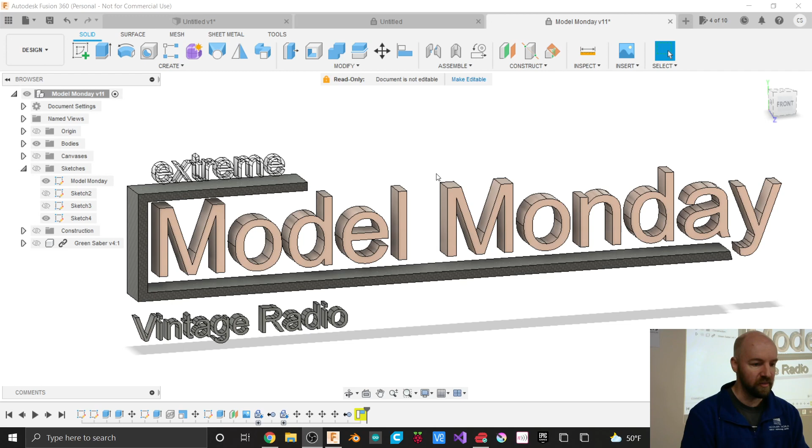The way that I'm going to approach this is from a sheet metal standpoint. So the idea here is we have a piece of wood that we kerf cut and bend into that outer curvy shape of a radio. And maybe this will make more sense once we actually get started.

So I've got a new document open here. And actually, before, kind of this kind of thing here. I think the one I draw is going to be a little bit different than this, but this is kind of our general idea of a shape we're going to try to get done in class today. I'm going to go ahead and not even save that, because I'm bold like that.

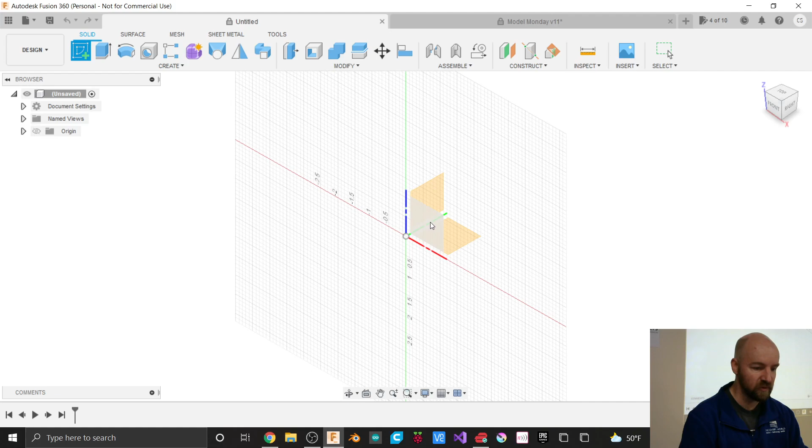All right, cool. So I'm going to go ahead and start a brand new sketch. So I'll click on this create sketch icon here. I'm going to start my sketch on the front. So I'm going to use this front drawing plane here, so I can click on the front in my navigation cube if I want to make sure I click on the front drawing plane.

And now on this drawing plane, this is going to define the shape of our radio. So let's first think about a height and a width. So I'm going to grab my Create menu tool, the 2-point rectangle tool. And I'm just going to use this 2-point rectangle to define the outer edges of my radio.

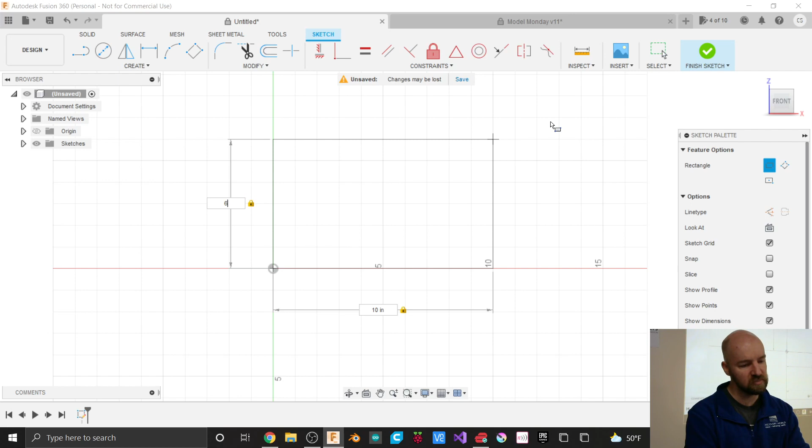So I want my radio to be like 10 inches wide and let's say 7 inches tall. 10 by 6? 10 by 6. That seems pretty good. Looks like a nice ratio to me. I suppose we could use the golden ratio or something like that, and I'll probably draw a couple of these sketches just so we can get a feel for the different kind of shapes that we can do here.

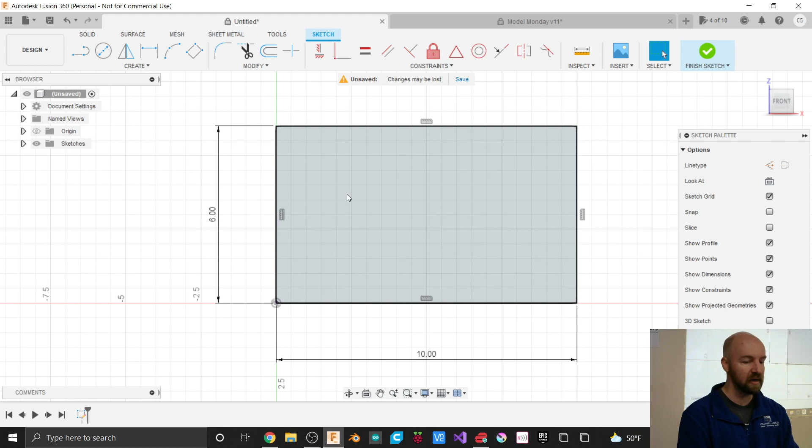So I'm going to turn all of these lines into construction lines. The reason being is I'm just using this to define the outer edges of my sketch. I'm not actually going to use these lines. So I'm going to turn these into construction lines here just by clicking on them and pushing the X key.

You can also highlight them, and then in the sketch palette we have here, you can change the line type into a construction line there, and that'll change that to a dashed line.

And now I'm going to start actually drawing my radio. So I'm going to grab my line tool and I'm going to draw a line out from the bottom center here. So right down here at the bottom, right at the midpoint, I have my little blue triangle that pops up telling me that I'm snapping to the midpoint of this construction line.

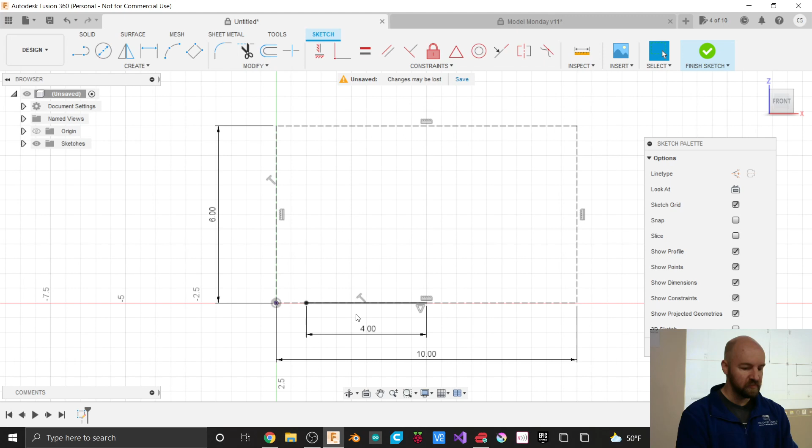And I'm going to draw my line over, let's say, 3 inches. That seems fine for now. Maybe 4. Let's go a little bit further. Now, you can move these measurements around if you want to place them in any particular way. I'm going to draw another line that goes up from here up to the top corner here. And then finally, a last line that will go over to the middle here.

And now I'm going to draw one more line that just kind of divides it right in half. And that line too, I'm going to turn into a construction line. So I've kind of got half of my frame drawn here. And I'm going to add in some curves now. So in the Modify menu, I'm going to come here and grab my Fillet option.

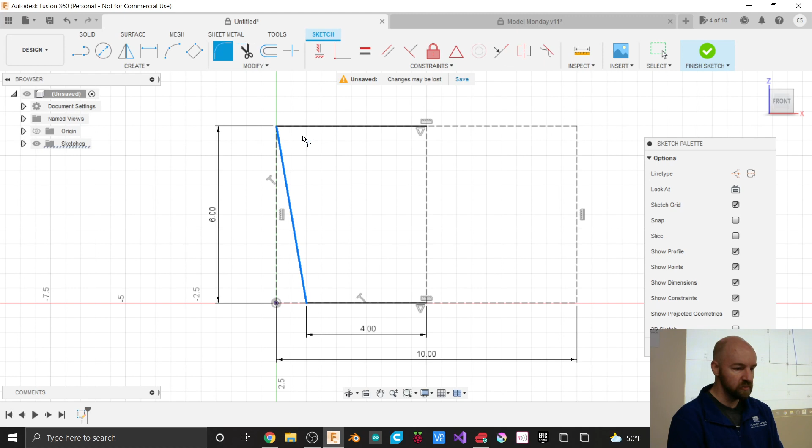So what this fillet option lets us do is choose 2 lines that are connected to each other, and then specify a dimension here. So I'm going to go with 2 inches. 2-inch radius seems pretty good. And before I click enter, I can add in additional lines to add fillets to. So I can add that same 2-inch fillet right down here at the bottom as well. And then if I hit the enter key, it'll go ahead and place those fillets.

And you can see I've got a radius dimension here that it gives me. And if at any point I want to change that, say I want to make that 3 inches, oh, it swore at me. Failed to resolve. Modify one or more of the following constraints. Those tangent constraints are... That's interesting. Well, 2 inches is what I wanted it to be anyway.

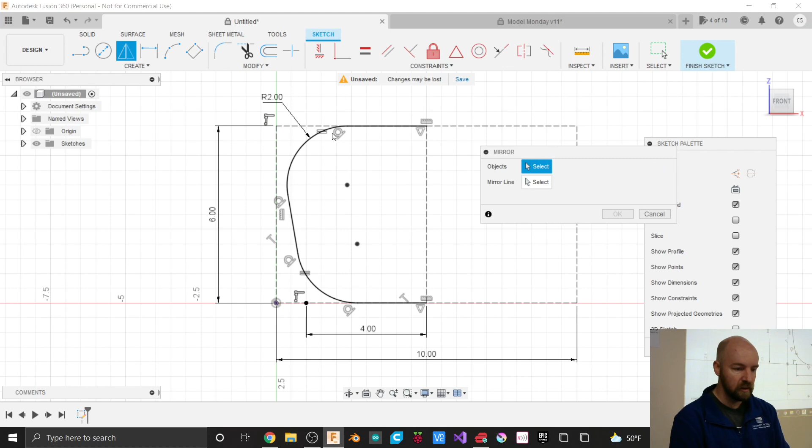So now the only thing I have left to do to complete the shape of my radio here is to mirror it over to the other side. So I'll grab my mirror tool here and I'll specify each of the lines. And it may be a little bit of a dance to pick the right line. I don't want to pick the dashed line, I want to pick the solid line. So you can see the dashed line is not highlighted, but my solid line that I drew is there.

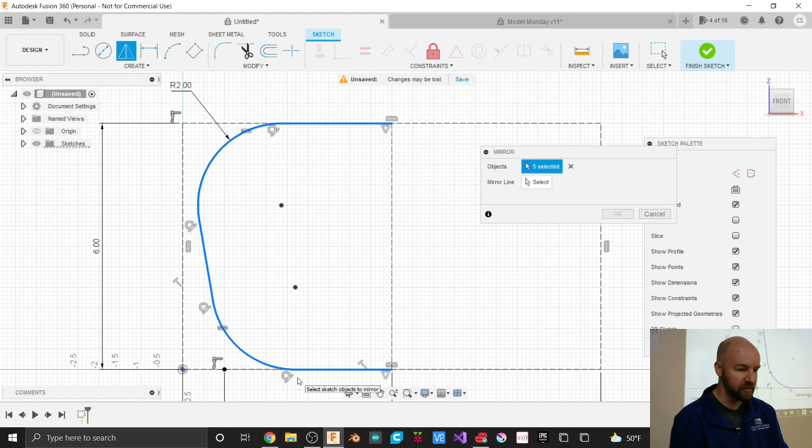And because those lines are right on top of each other, it may be a little dance. You may have to zoom in to make sure you're able to highlight and click on the proper line there. And then as our mirror line, I'm going to choose this middle section right here. And then I'm going to say OK. So that's the basic shape for this radio here.

Let me go ahead and draw another one just to show you options here. I'm going to just draw it right next to it, because why not? So I'll grab my rectangle tool, I'll grab a 2-point rectangle, and I'm going to place it right in here. And I'll make this one the same size, 6 by 10 is what I made it. And again, I made these into construction lines.

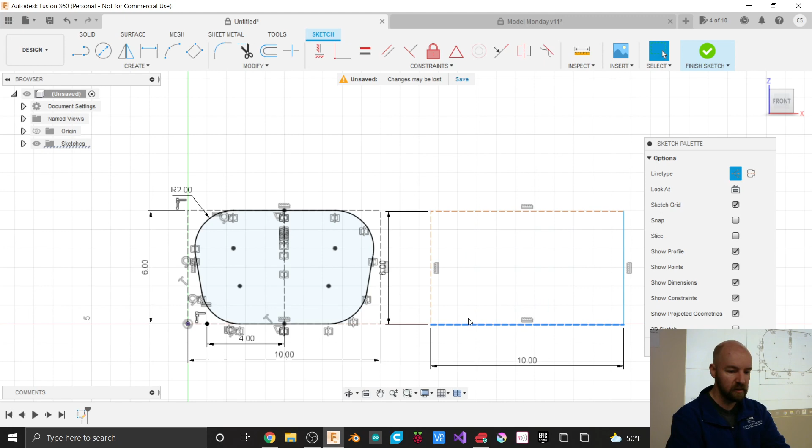This is where we're getting into that creative freedom that I used to point out a lot in class. Because ideally, you guys are going to draw your radio. You guys aren't going to draw my radio. You want to make your own thing. So that's why we're makers here at the Makerspace, because we want to make the stuff that we want to make.

All right, so let's see. Another shape that we could do is, what if it was just kind of an oblique shape? That's kind of interesting. So if I grab my line tool and I start in the bottom corner and I go over to the side at kind of an angle like this, and then I just connect those lines to our midpoint.

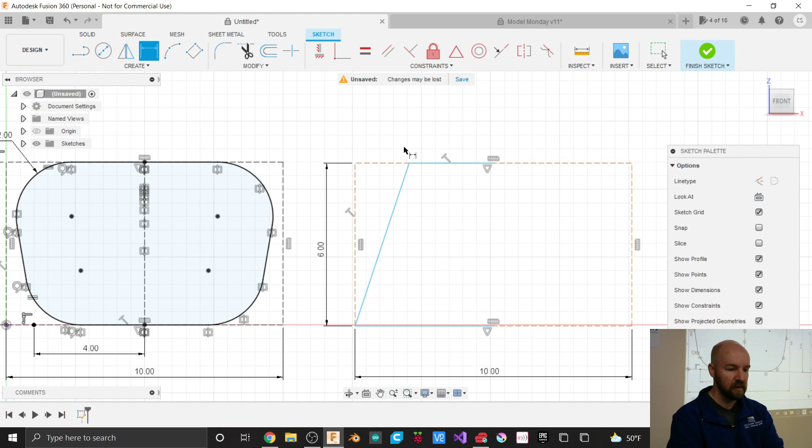Let's see, how could I specify? Maybe what I'll do is add a dimension. What I want to do is draw this line over here, but I want it to be kind of symmetrical. I won't be able to use the mirror command like I did before. However, if I add a dimension here, if I go up and say sketch dimension, and I figure out what length that is, maybe I'll make it a nice round number like 2 inches.

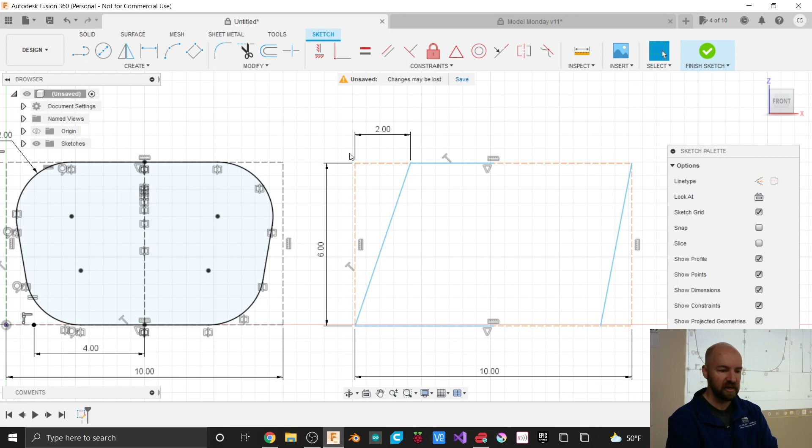Now I can do the same thing over here. I could draw a line from the top corner somewhere down to the bottom here, and I'll purposefully make it in definitely the wrong spot. And now I can use that same dimension tool. So up here I gave this a dimension of 2 inches. Down here I'm going to do the same thing. I'm going to say create, and then sketch dimension, and give those 2 points a dimension, and I'll just give that 2 inches as well.

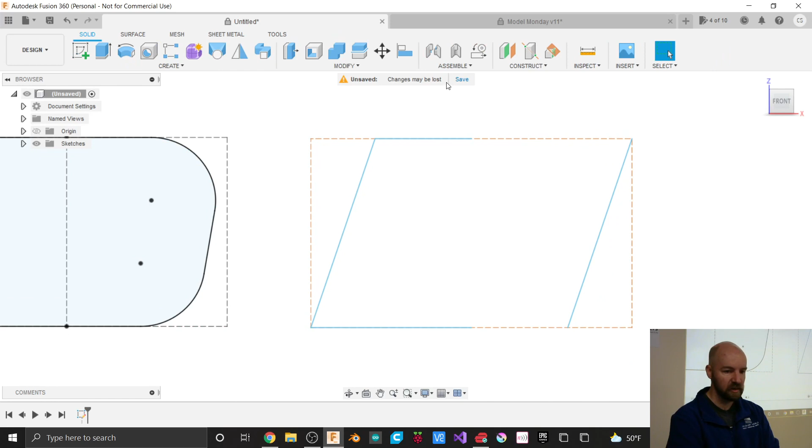And then I'll say finish sketch. Oh, not finish sketch, because I need to connect the dots there. So I just need to connect the center over here like that, and the center over here like this. And now I can do just like I did before, because we're all about the curves here. Oop, and that was the wrong curve. So if I hit this dashed line and then hit the straight line, it may not give me the fillet that I'm looking for here.

So another way to select your fillet is if you hover over the corner, that works here, then I can give that a fillet of 2 inches there, and I can do the same thing down here. There's my little 2-inch fillet. I suppose if it's 2 inches, it's not really little, huh? And you know what? Maybe I'll leave it pointy up here in the corner. That's kind of an interesting shape. Maybe we'll roll with that.

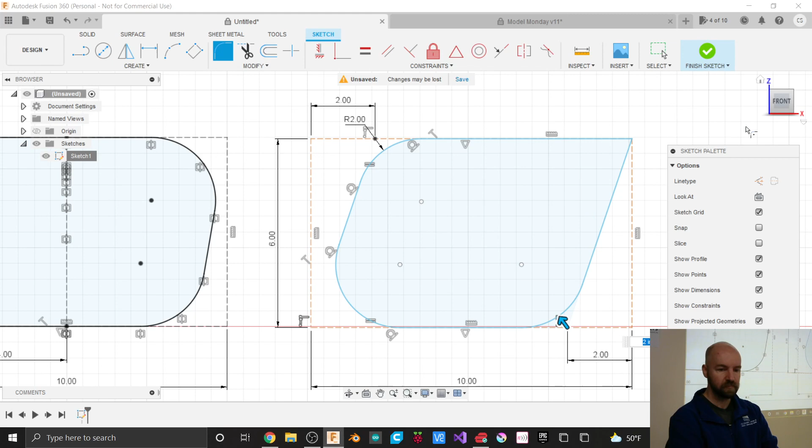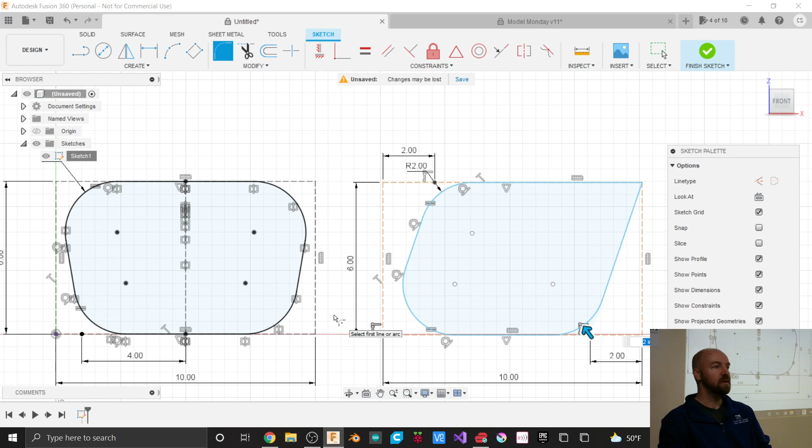Alright. So, the last thing that we want to do to this sketch is to kind of put a split in it. Do you guys have a shape you're happy with, or should I give you some more time? A little bit more? I'm hearing lots of mouse clicks here, so I'm hearing a little bit more time. Maybe I'll do one more.

So I'll come up and make another rectangle. And again, I'm making mine 10 by 6. Something worth noting, if I know I want to make construction lines, before I start making my rectangle, I can hit this little line type construction button here. And now if I say rectangle and 2-point rectangle, give it my 10 by 6 measurement, it's going to make everything that I draw construction lines until I turn this button off. So I don't want to do that anymore.

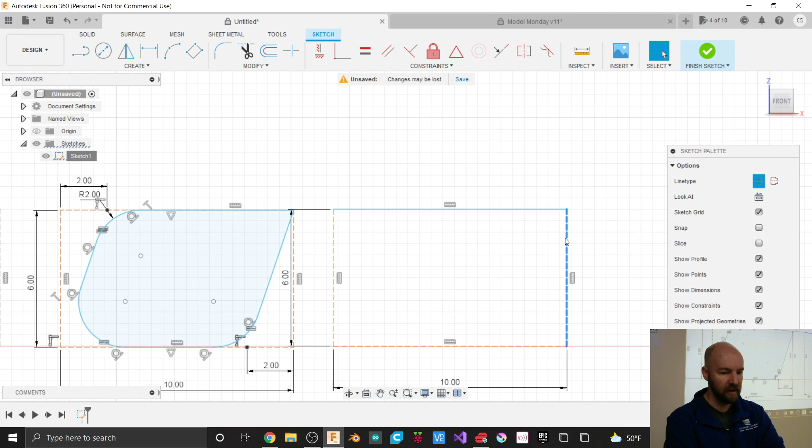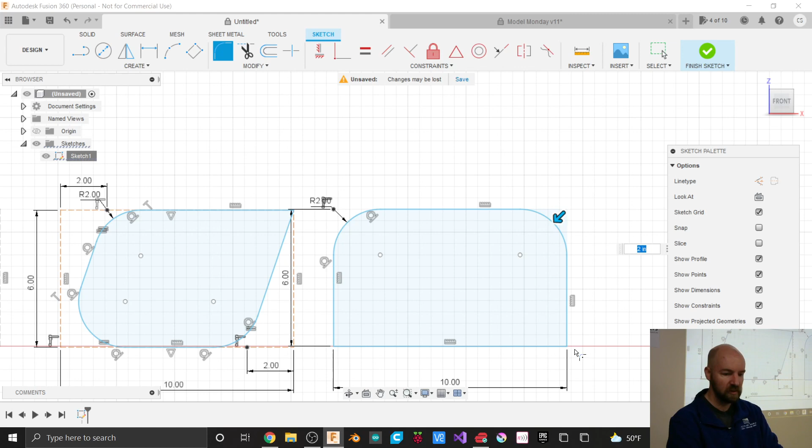Let's see, how about another shape. Instead of making this a construction line, I'm going to make my actual shape out of this rectangle here. Grab my fillet option here, and I can just start specifying corners. Maybe I'll just do the top. Leave the bottom a little angled piece there.

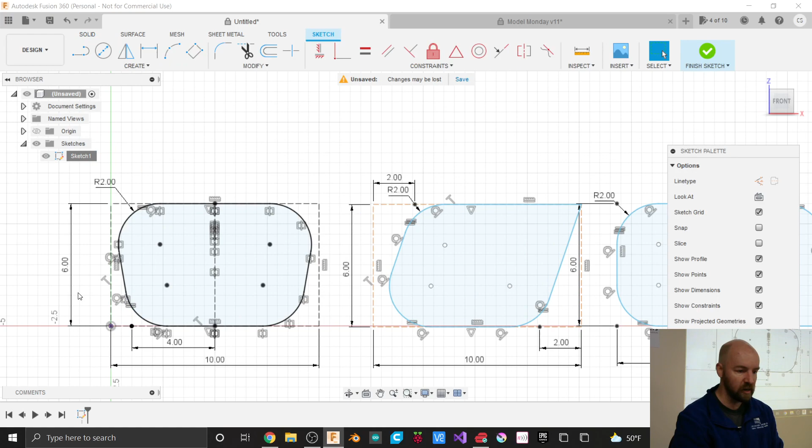Alright, cool. So before we finish our sketches, we need to do one thing. I'm going to go over and pick one of mine. Right now, as we drew them, our shapes are one continuous line, hopefully, a line that goes all the way around. However, for this sheet metal trick, we actually want this not to be a continuous piece, because we need to unfold it, and in order to unfold it, it's got to have a break somewhere in it, and I'm going to choose to make my break right at the very bottom.

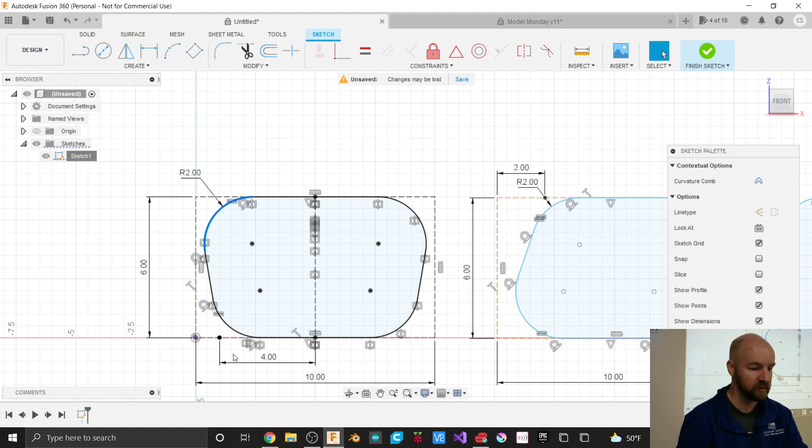So the place where the seam is going to be is right down here at the bottom. Now, if you've got a design where you've got a corner, a good place to put your break would be right at this corner. So maybe I'll do this in a couple ways too. On this first piece, if I zoom out and zoom way in down here to the bottom, I'm going to draw a line that goes straight up from the bottom, an unspecified dimension.

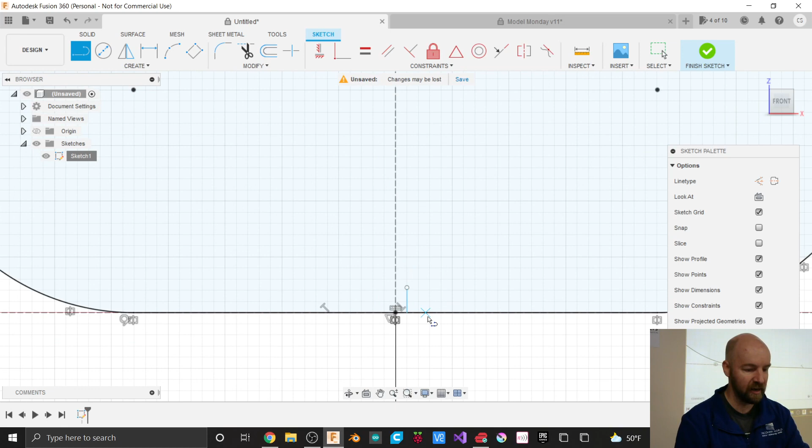Just needs to go straight up, and the key measurement that we want to add here is I want to add a dimension. So I'm going to click on Create and then Sketch Dimension here. And now if we specify that line and my midline there, I'm just going to give this the most minuscule spacing of 0.01 inches, because I need to have almost no space at all here. So the idea is we just need to break this line open.

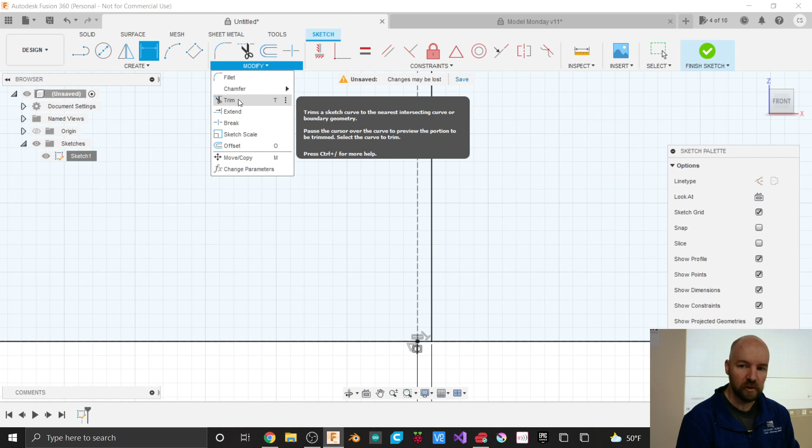So I've got a 0.01 inch measurement now, and now I can come in and use a tool that I don't use a whole lot. From the Modify menu, there is this Trim tool. So the Trim tool will let us specify a line to cut out, and it finds that cut point based on 2 other lines. So the 2 other lines that we have here is my little dashed line and this line that I just made. And now I can click on that line that I want to cut out there.

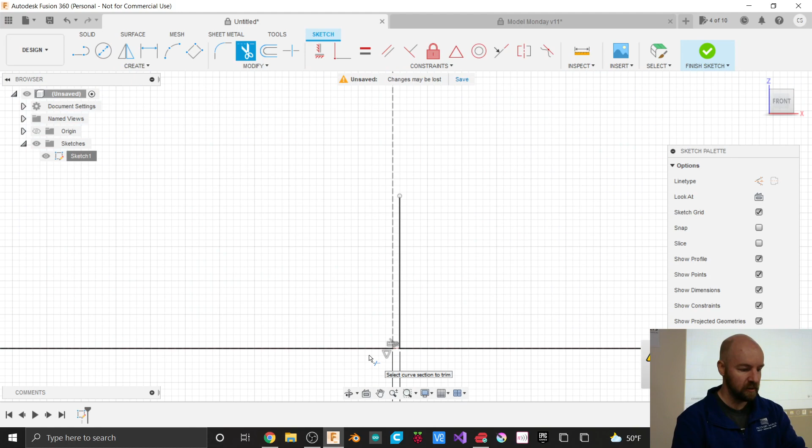I'm going to turn this little tiny line into a construction line. So now our line does not go all the way through. That's just our dash construction line that's following through there. I'll do this in one other of my drawings here. So over on the side, like this guy way over here, because I've got a 90-degree corner here, I'm going to choose to make my break over in that corner.

So I'm going to draw a little line here of an unspecified height or dimension. I'll turn that into a construction line by hitting the little line type construction button in my sketch palette there, and that turns that into a construction line. And then I'll specify a dimension that this line is away from this line, because this little piece of the line down here is what we're going to cut away.

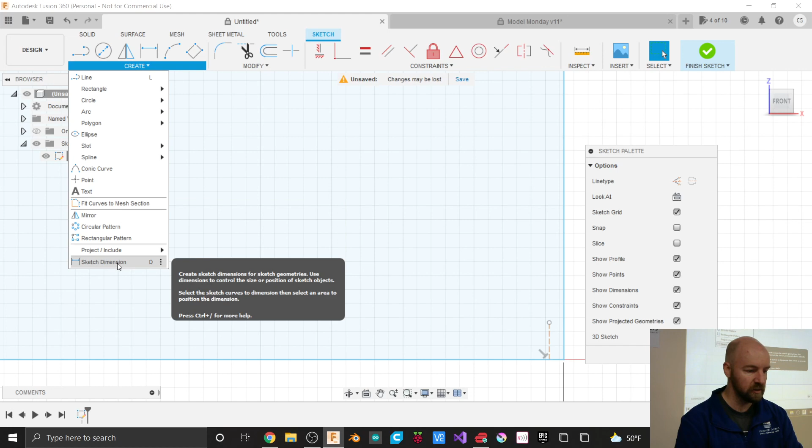So in order to do that, we click on Create, and then we come down to Sketch Dimension here. And now I'm going to dimension this line from that line. And now there's this little measurement I can place somewhere down here. And again, just like 0.01. Will that work? That'll probably work. And then I just need to trim away this little bit here, because right now this is a continuous shape, and we want to trim away this little bit of the line.

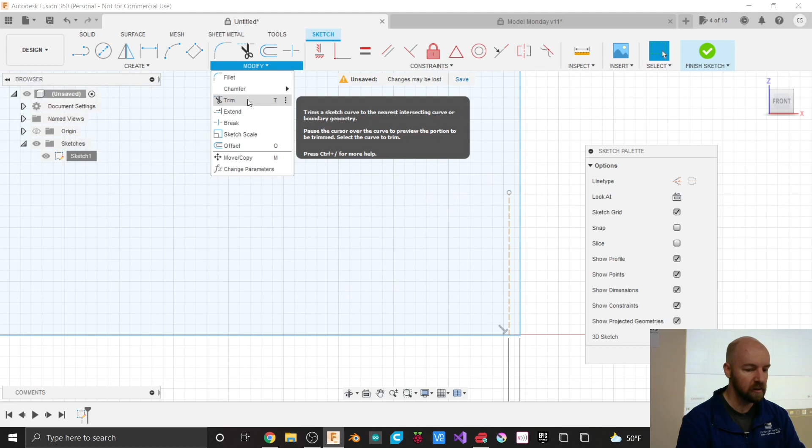And we'll do that by clicking on the Trim tool in our Modify menu. So we'll go ahead and click on Trim, and then I'm going to specify that little piece of the line down there. So now it's broken away, and we've got one line that comes all the way. It's got a start and an end, as opposed to a continuous circle.

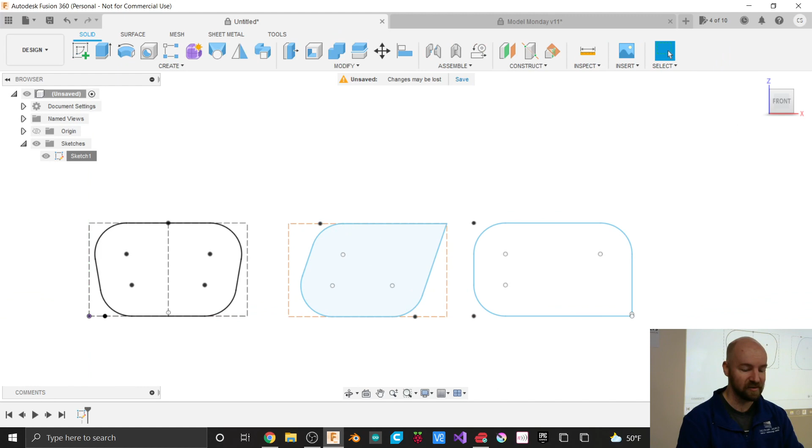Alright, and you'll also notice that this middle one that I did not do that cutaway on, this is an enclosed shape, so I could extrude this. These shapes on the side, because I made that cut, are no longer an enclosed shape, so it's not a thing that I can extrude anymore. Does that make sense? Yeah? Alright, so I'm going to go ahead and say Finish Sketch. I'm going to name my sketch. I've got this sketch 1, and I'm going to call this Radio Shape.

Alright, cool. We want to make this form here that we're making. So I'm going to leave the comfort of my solid workspace here. We've got these workspaces up at the top. We've got solid, we've got surface, we've got this mesh workspace, and I'm going to enter the sheet metal workspace. Sheet metal, ooh, it's like witchcraft over here. And when I say witchcraft, I mean it's a lot of flanges. There's a lot of flanges when you're in the sheet metal workspace. In fact, almost everything that you do will be, in some way, shape, or form, the flange command.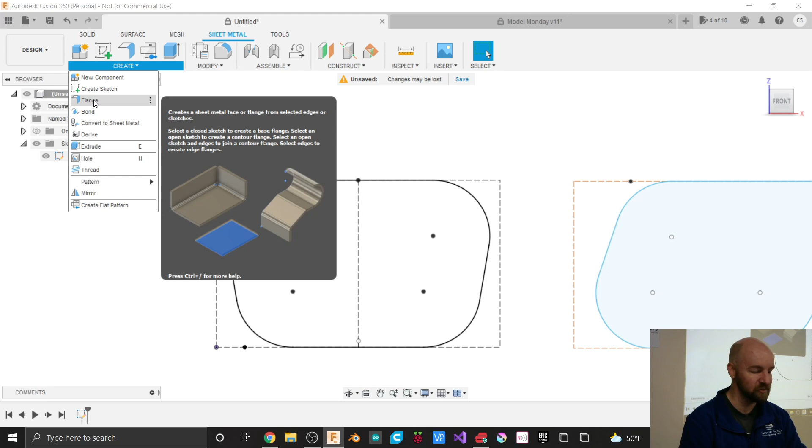So from the Create menu, if you scroll down to Flange, this is a useful command. We're gonna get to know this well. So I'm gonna go ahead and click on this Flange command, and I'm gonna specify as my flange that non-continuous line. I think I actually have to pick on both of these.

So I clicked on, for me I had to click on 2. It's only showing 1 profile. But I had to click twice, so I had to click on each side of that line. And I can scroll down and see that indeed there is no selected line in between where I have my little break there. And that's important.

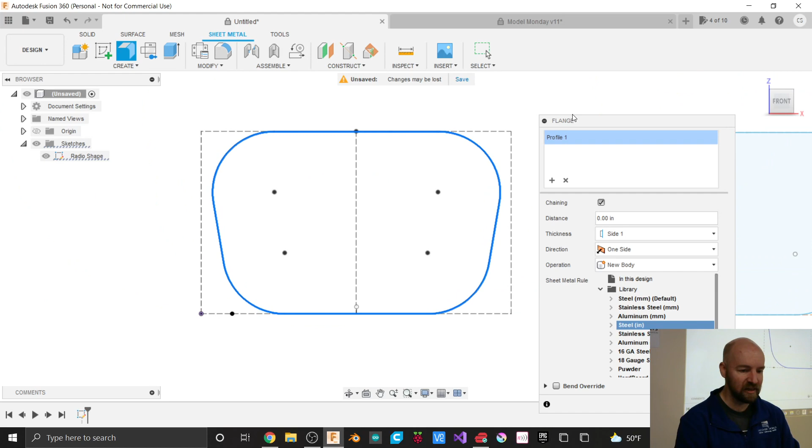Now we have to tell it what set of rules that we're going to use. So the sheet metal rules, there are some built-in rules here that we see over on the side. So there's various kinds of steel, stainless steel, or regular steel, or aluminum. There are inch and millimeter measurements for steel, because when you order various gauges of steel, you'll probably order them by gauge, or you can order them by millimeters.

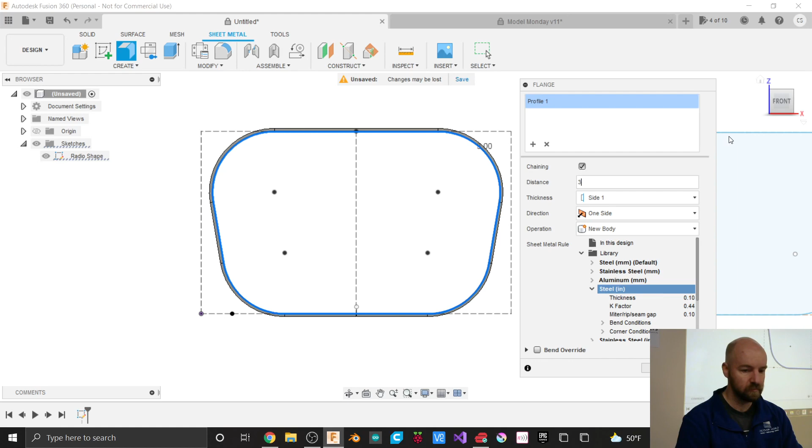So if I choose this steel inches option here as the rule that I'm gonna go by for now, and now I specify a distance, and I'm gonna make this like 3 inches. So when I typed in a distance, now you can see we've got some thickness going on our piece. And something that I'm noticing is I actually wanted this line to be an outside diameter of my piece. And right now my sheet metal goes outside of that line. So all I have to do in order to change that is to change from side 1 to side 2. And then I'm going to say OK.

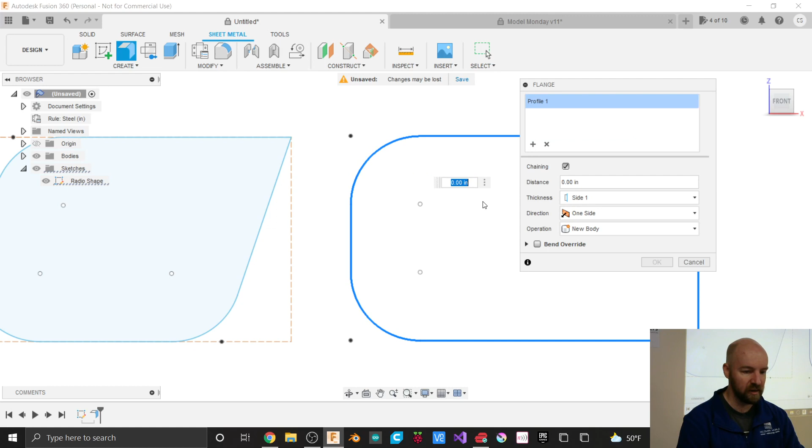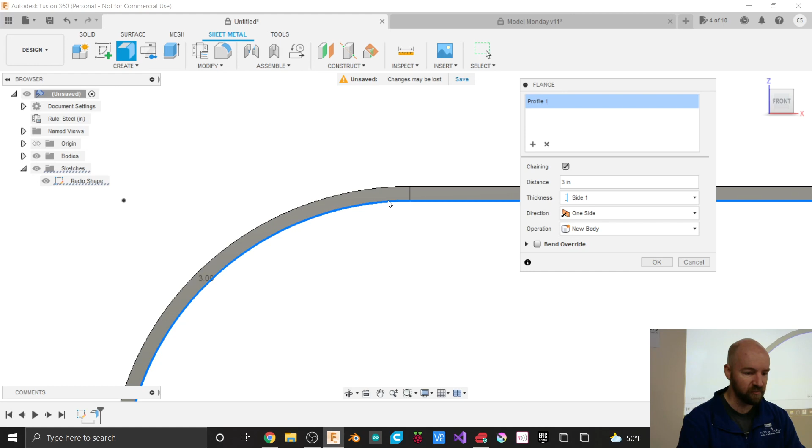Now, let me cover something just in case one of you guys had this problem. If, for example, like this line over here, if I do that same operation, if I choose my flange command, and I pick this line right here, and let's make it 3 inches, and I'll change my sheet metal rule. Actually, you can only have 1 sheet metal rule per document, so I'm already using my inch steel rule here. Now you'll see here in this case too, it's on the outside of my line. So I go, oh, well, I'm just going to change that from side 1 to side 2. And it gives me an error.

And the reason it's giving me an error is because down here, I'm going to change this back to side 1, where we specified this little distance here to be 0.01 inches. If I'm making my sheet metal on the inside of this line, you could see how those pieces of sheet metal would collide with each other and overlap, and it's kind of disallowing that from happening.

So in order to fix that, in this kind of case here, I have to go back to my radio shape sketch here and edit it, and then I have to change this to be a little bit bigger than the thickness of my sheet metal. So my sheet metal is 0.1 inch. If I make it 0.12 and say finish sketch, and now I grab my flange tool here, say I want to make a 3-inch flange and I want to make it on side 2, now it'll let me do that.

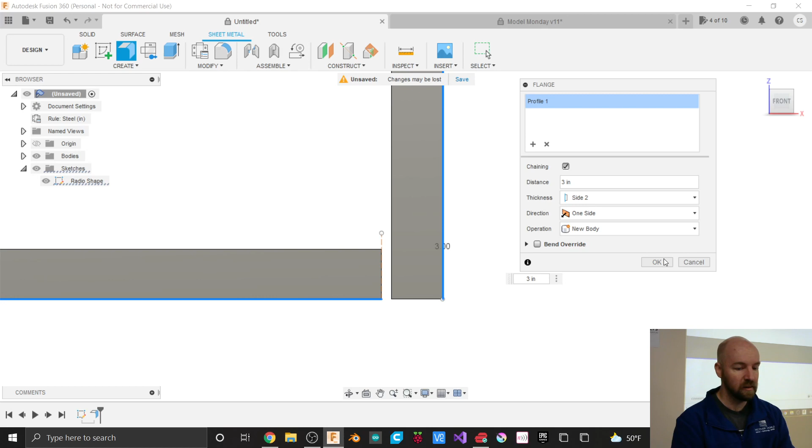Alright, so are you with me so far? Yeah? No? We'll take it. You're catching on, alright, right on. Alright, so

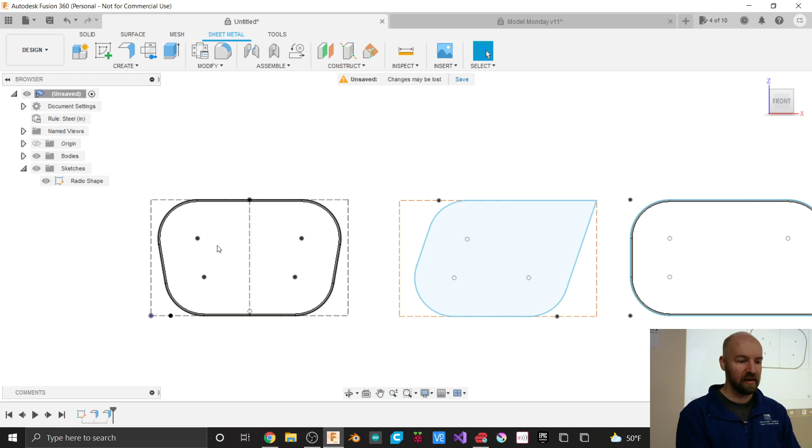I kind of mentioned at the beginning of class, but I really want to make this out of wood. And right now, we're making this out of sheet metal. And I suppose you could roll with it and say, hey, I really like to make my radio out of sheet metal. I think that'd be cool. And I say power to you. It's your project. You can do whatever you want. If you want to make a cool bent sheet metal radio, bending it is on you.

But if you're like me, and you want to come in here to the makerspace and not bother Nick, I'm going to make this out of wood. And the way that we're going to do that is we're going to make our own sheet metal rule. So over here in the browser, we have this new option that's popped up. Once we made our sheet metal and made this a physical thing, we have a sheet metal rule that's popped up here. And if we want to, we can change those rules. So I'm going to click on the Modify menu, and I'm going to choose Sheet Metal Rules here, right from the second from the top.

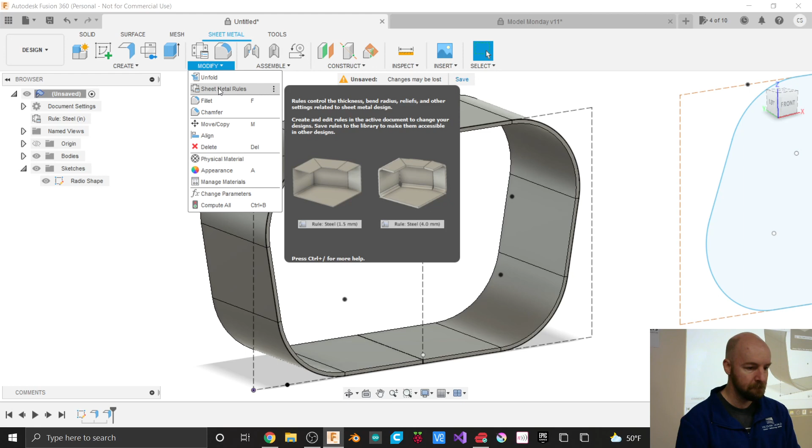And now I've got this steel inches measurement that is specified as being in this design. So in this design it says steel inches, and I can edit this specific rule by clicking on the little pencil icon, or what I want to do here is I can make a brand new sheet metal rule so I don't mess up my existing rules. I can make a brand new sheet metal rule if I click on this second icon, and if I just stop moving my mouse, it'll give me that new rule tooltip there.

So I indeed do want to make a brand new rule, and I'm going to go ahead and name it. So instead of steel inches 1, this is going to be 1/2 inch plywood. Now I will say that there's a whole crap load of 5/8 plywood at the makerspace, so if you're looking for materials, let's make this a 5/8 inch plywood. Actually, you know what? I don't know what to expect for a K factor when we do that, so I'm going to make mine a 1/2 inch. And the thickness of this material is going to be 1/2 inch.

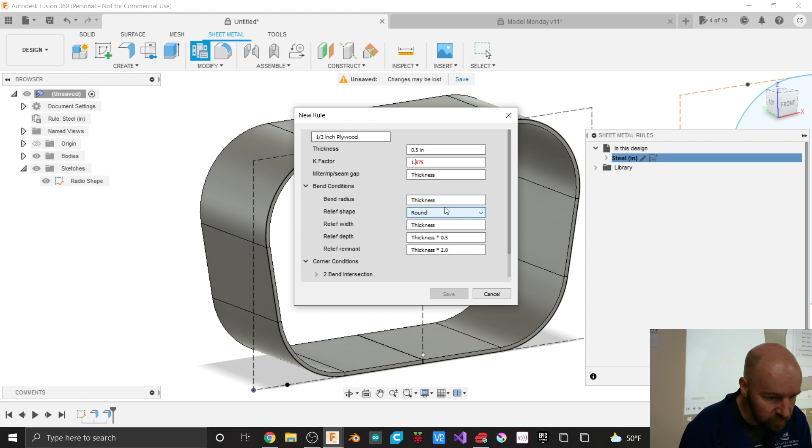Actually, there are bend conditions. This is getting interesting. Relief width, corner conditions. There's a lot of interesting things happening here. All right, so 1.875. Oh, it won't let me do it. Why won't it let me do it? Do I have to type inches? Well, that's interesting.

It lets me do 0.5. It lets me do 1. Why won't it let me do 1 point? Well, it won't let me do over 1. I guess we're going to roll with that. And I'm going to go ahead and say save.

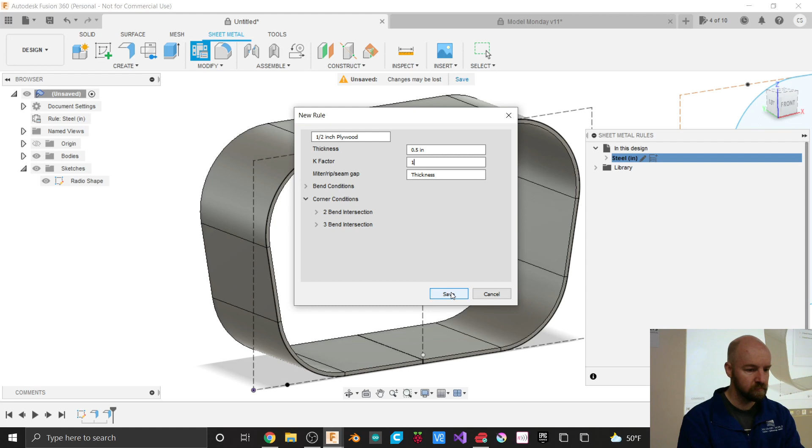Alright, so now over here in our drawing, we've got these sheet metal rules. I made a new one. I'm going to go ahead and say close. And now we can change our sheet metal rule from steel inches. If I click this change rule icon that pops up when I hover over this sheet metal rule here, now I can see I have this 1/2 inch plywood option that I just made, and I say OK. Now it'll make this one just fine.

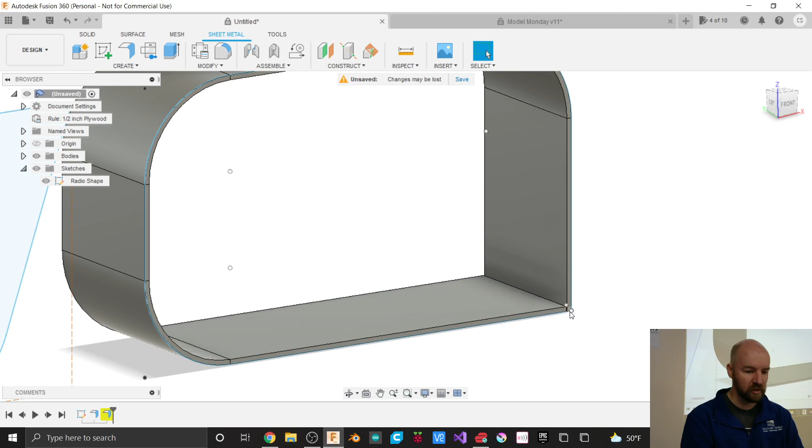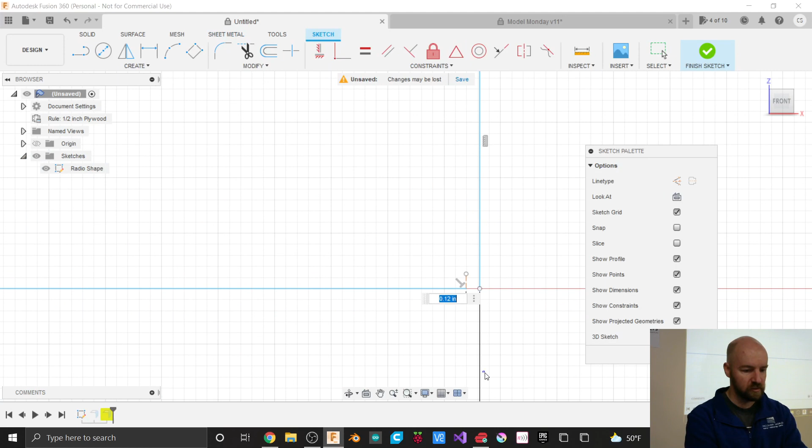The next step here is, well, tell you what, let's make an unfolded flat pattern. So if I come up here to my create menu, and now I choose create flat pattern because I'm in the sheet metal space here. I need to select a stationary face. So I'm going to rotate and look at the bottom of my radio form here, and I'm going to specify one of these sides here. So it just needs to be a flat area.

Go ahead, did you have a question? No? Okay, cool.

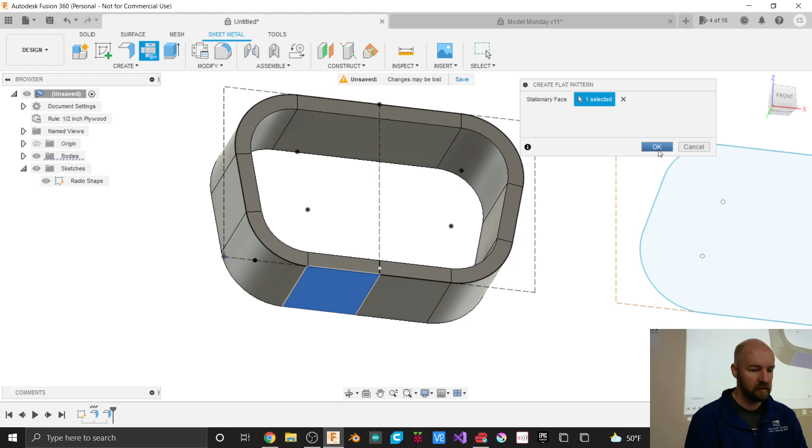So it just has to be a flat area. Any of these flat sides would be a fine option to choose to unfold your sheet metal. But I'm going to click on that stationary face right there, and then I'm going to say OK. So this gives us our unfolded piece here, and you can see that we've got a length that we know to make our board now. So we've got this 26-inch long board that we'll be making our piece out of. If you want to make this radio in that exact same dimension as I did, it's even got some center lines for our cuts, which would be real convenient.

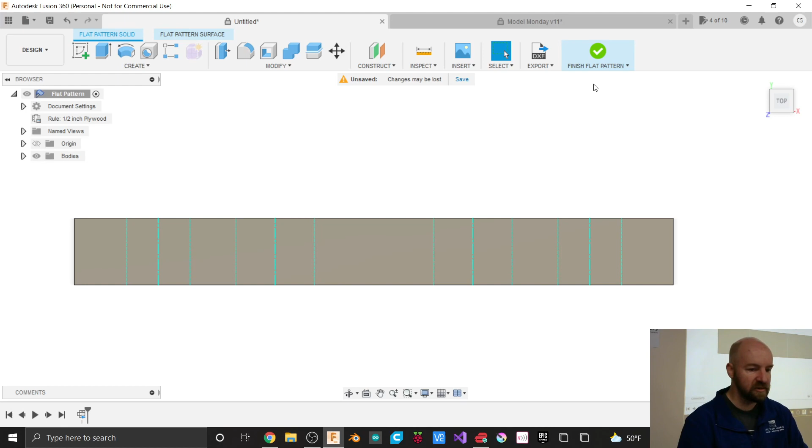Now, the thing that I'd like to figure out, and the thing that I didn't quite have time before class to do, is to add in the kerfs and see if it would still unfold.

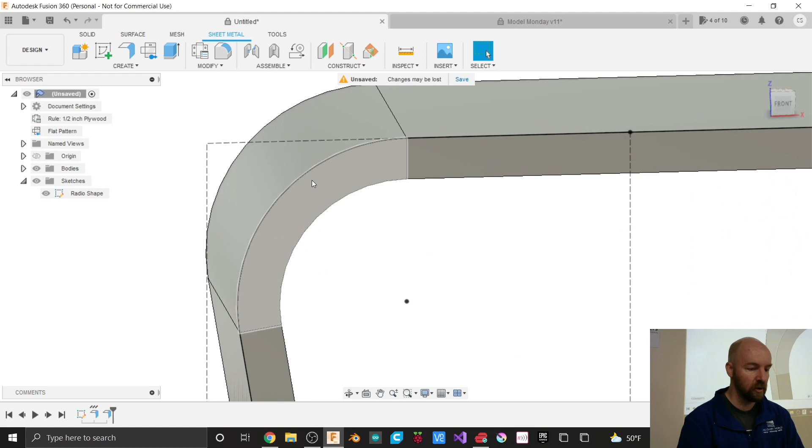So let's see if we can do that. When you kerf cut a piece of plywood, the idea of a kerf cut, so a kerf is a blade thickness. So the amount of material that a blade cuts away is usually known as a kerf. And the idea behind kerf bending is you cut a depth that's not all the way through your piece of wood here. So in our case is these inside corners.

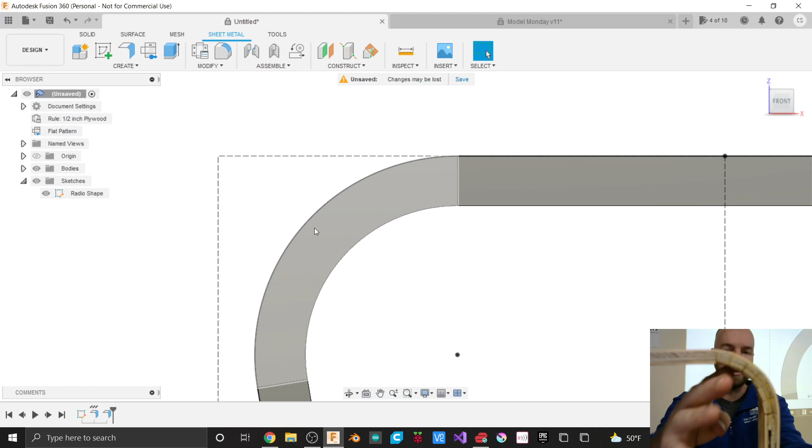Actually, I can hold it up to the camera here and you guys can look in class. I can pass this around. So it's got little blades that have been cut through it, channels that have been cut through it, kerfs that have been cut through it, and then it's bent, and that makes it pliable there. So here, I'll hand this to you guys. You can pass around class here.

So I'd like to try to model those in my design here, and I think my method for doing that is going to be to create a sketch. So I'm going to hide my radio shape sketch because I don't want to accidentally click on that. And I'm going to go ahead and from my create menu grab my create sketch option. Now we've kind of got already stop points for our curve here, so I want to try to utilize that for sure. So we've got these lines here that kind of represent the edges of our curve.

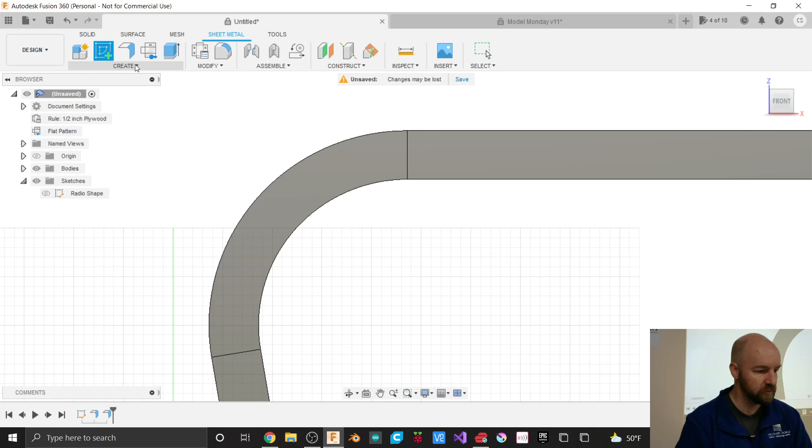So if I go ahead and say, why am I not creating a sketch? Create sketch. I'm going to specify this surface as my drawing plane. So any surface that's kind of the front of your radio here. And now on this sketch, I'm going to project a couple of things. So I'm going to project both of these curved sections here. Actually, I'm just going to start by projecting the outside line.

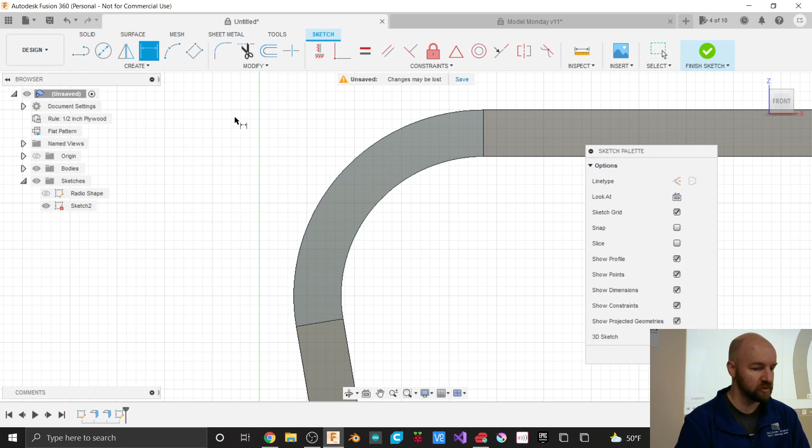So I'll go ahead and grab from my create menu. Is it in the create menu? Modify? It's in the create menu. And we choose project. Now, I always tell people, select what you want to do before you select what you want to do it to. So I'll grab my project include, project, and now this outside line, I'm going to project that. And I'm going to do the same down at the bottom. So this outside edge of this bottom line, I'll go ahead and project that. And then I'll say OK.

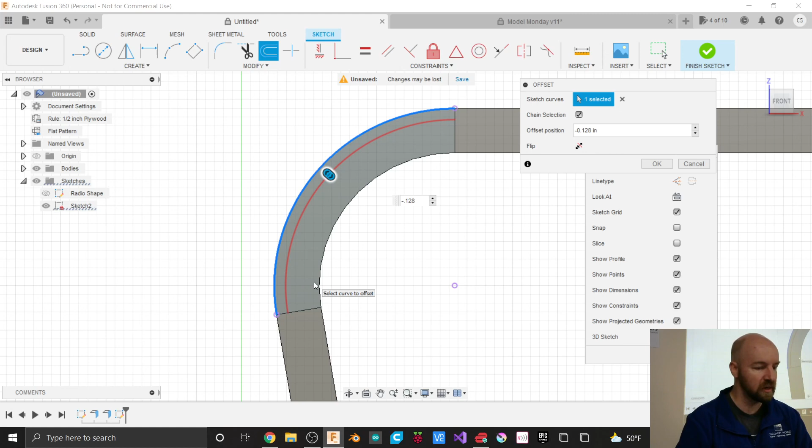Alright, so the reason I projected this line is so I could create the depth of the wood that we're going to leave here. So I can use my offset tool now. So in the modify menu, I can come down to this offset option and I can specify that line as that projected line that I just made there. And now I'm going to offset this 1/8 of an inch. For me, this is a -1/8 of an inch. For you, it might be positive, but the idea is that it goes inwards 1/8 of an inch in towards the center. And then I'm going to go ahead and click enter.

Now I'm going to draw... Can I find the middle of this line pretty easily? Oh, look at that. So I'm going to draw a line from the center. This little point here represents the center of this radiused line that I just made. So it's actually the center of the projected line as well, because they're concentric on each other.

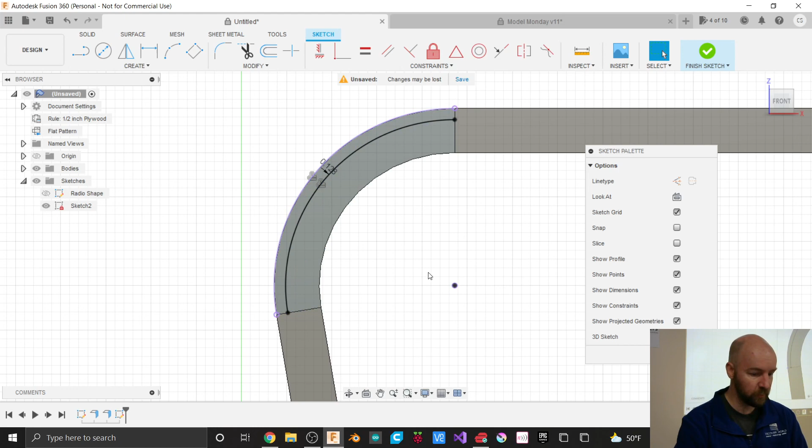But if I draw a line from that center point, and I try to get the very center of my curve here, and you can tell I'm getting the center of the curve. If I zoom in, it might be easier to see. I am getting a little blue triangle that's popping up. So if I hover near the midpoint of that line, it gives me that little blue triangle midpoint snapping option.

I suppose here, if I do it wrong, so I did not snap it to the midpoint, I can add that constraint after the fact. So from my constraints menu, I can totally add a midpoint constraint. Yeah, so here it is, midpoint, and I can say that point is on the midpoint of this line, and there we go, and it snaps right into position there.

Alright, I'm going to stay zoomed in here, because now what I want to do is I want to draw another line, and that line is going to go right from the end of this line here, and it's going to just connect to our outer edge.

So it can be anywhere on this line, because we're going to add a dimension after the fact. So what I really want is this line at this point to be exactly 1/16 of an inch away from this other line. But I'm going to go ahead and specify that after the fact as well. So in order to do that, I'm going to add one more dimension.

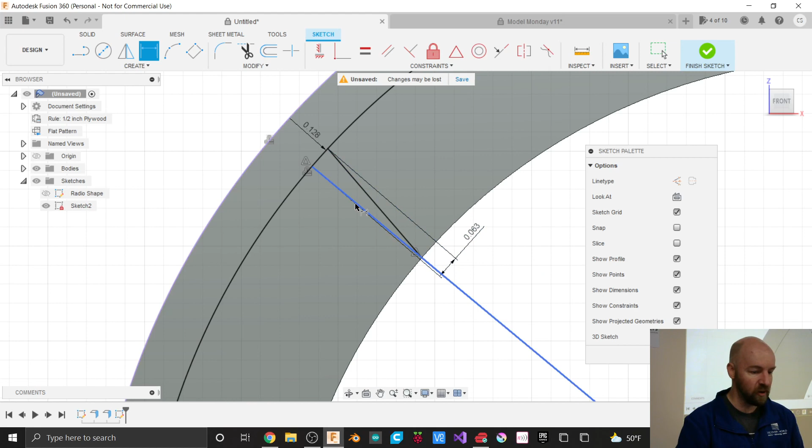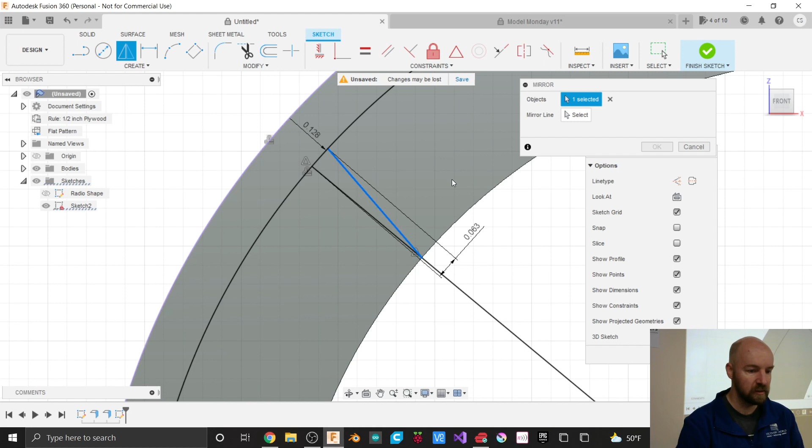And now to finish out this single cut here, we're going to use that mirror option again. So I'll use the create menu, and I'll come down to mirror. I'm just going to pick that angled line that we made as my object that I want to mirror. And then as the mirror line, it's going to be that long line that connected to the center of this arc here. And that's going to be our cutout there. So I'm going to go ahead and say OK. And I'm also going to go ahead and say finish sketch.

So I've got a single kerf here, and I'm going to go ahead and cut that out from my shape. And the way that I'm going to cut that out is just by using an extrude command. So if I choose this extrude option, and I pick on both halves of that shape, I'm going to go backwards.

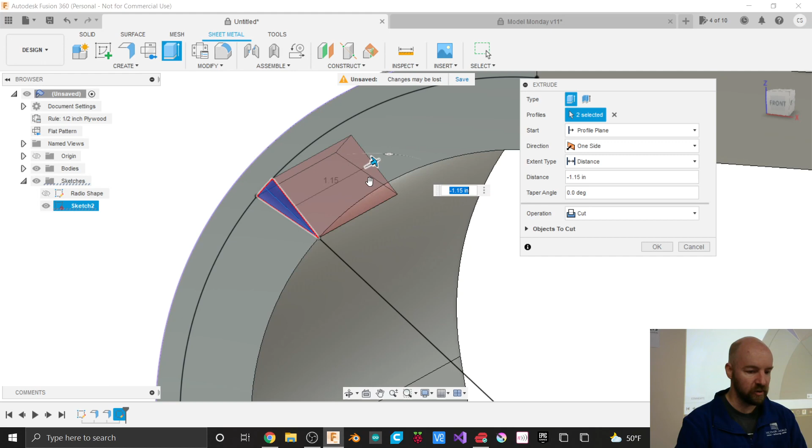Something that is useful here, so I always try to think about how to make things so they're parametric, right? I could indeed specify a dimension here, and go back. How big was my piece? It was 3 inches or so. I feel like it was negative. It was 3 inches. Yeah, I made mine 3 inches, and I could say OK here. Now that totally works, right?

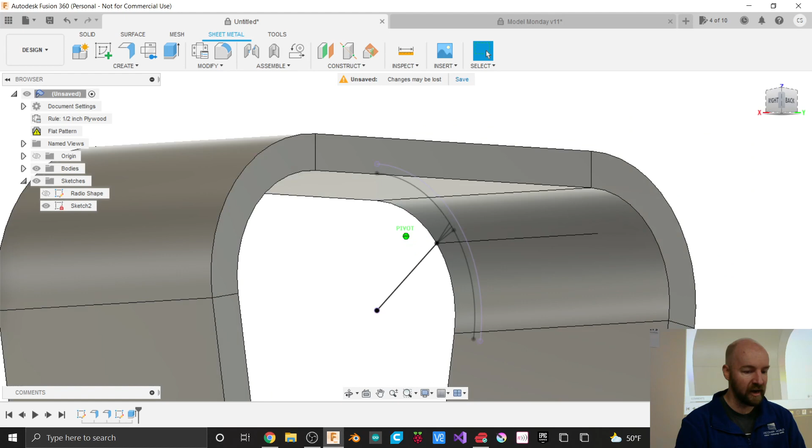But at some future date, I might decide, hey, when I made this flange here, I don't want that flange to be 3 inches anymore. I now want that to be 4 inches. So I went ahead and changed that, and now if I look at the back, oh look, my cutout doesn't come all the way out the back, right? And that is because this extrude will always be 3 inches long.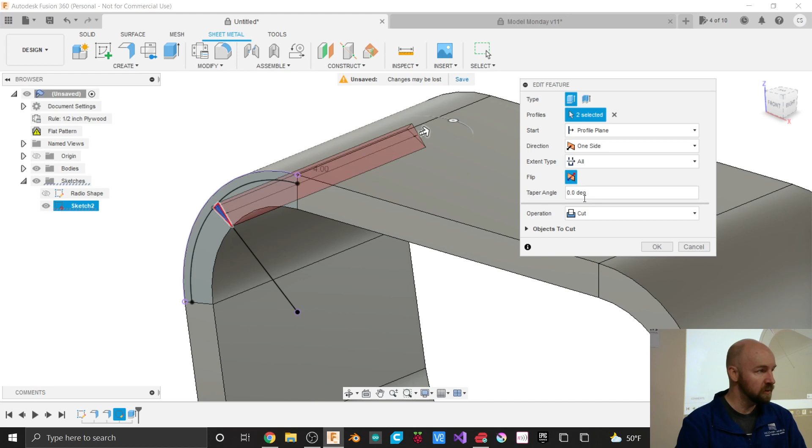And the way that we avoid that is by changing our extent type. So usually we use an extent type of distance. If we choose to do this extent type of all, no matter how big or small I make that flange, our cut will always go all the way through it. So if I say OK here, now I can right click on that and say edit feature. I can make this 10 inches if I wanted to. That would be ridiculous, but you could, and the cut would still go all the way through.

Alright, now I'm going to fix that. I'm going to say edit feature, and I'm going to go back to my 3 inches, because that's a totally sane number to make a radio.

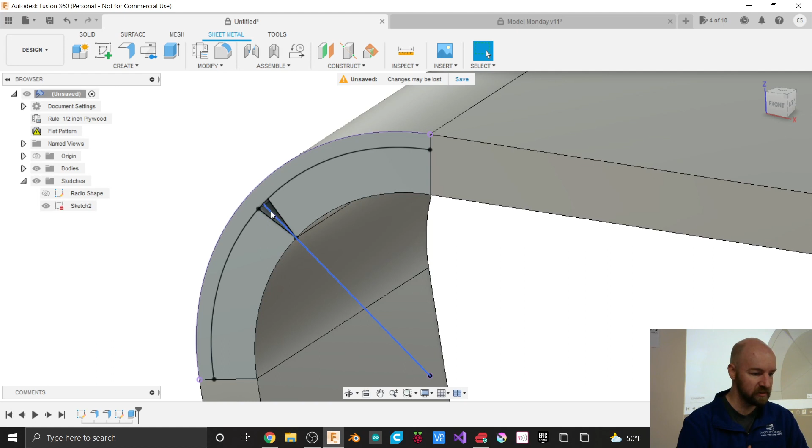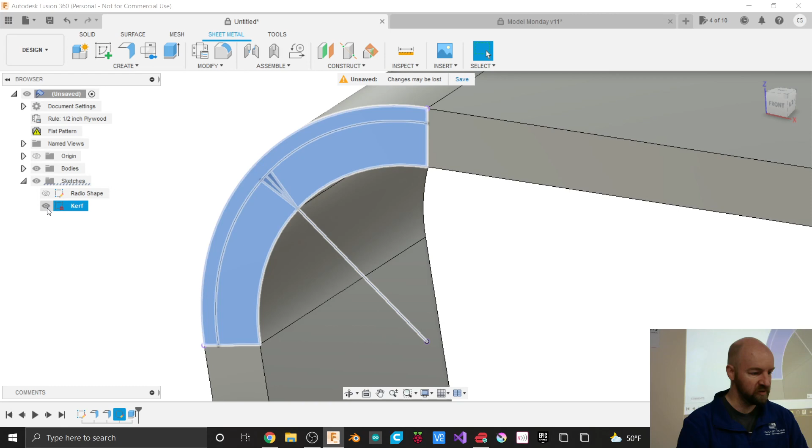Alright, now the last thing that we're probably going to cover in this class is repeating that kerf. So right now, when we actually make this, we're going to have a whole bunch of these kerfs cut in this curve here. Let's go ahead and name that kerf. I believe kerf is spelled with a K, is that right? Let's go with sure. So I want to make a pattern of this thing that I just made. And there is an option in the create menu to make a pattern along a path. And that is indeed exactly what we want to do here. So I'm going to choose this pattern on path option.

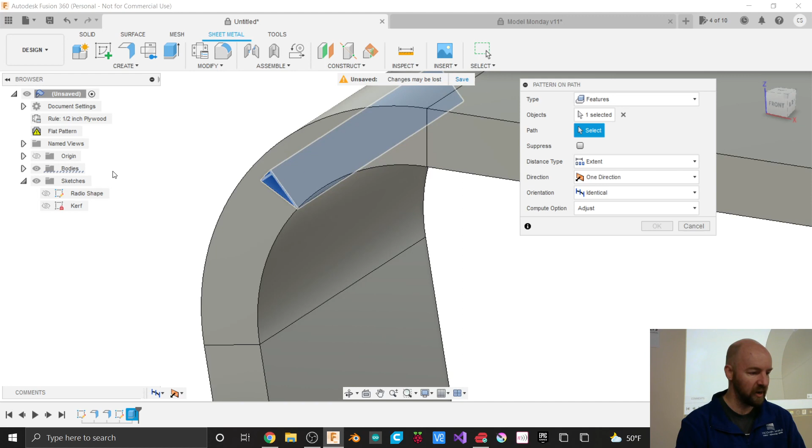I'm going to make a pattern not of a face or a body, but of a feature. So a feature is one of the things down here in this timeline. A feature could be an extrude, a feature could be a flange. I'm not sure why you'd want to make a pattern of a flange, but the feature that I'm going to choose is this extrude feature here. And for the path that I'm going to make that pattern on, I'm going to go ahead and turn on my kerf sketch one more time, because I'm going to choose that line as my path.

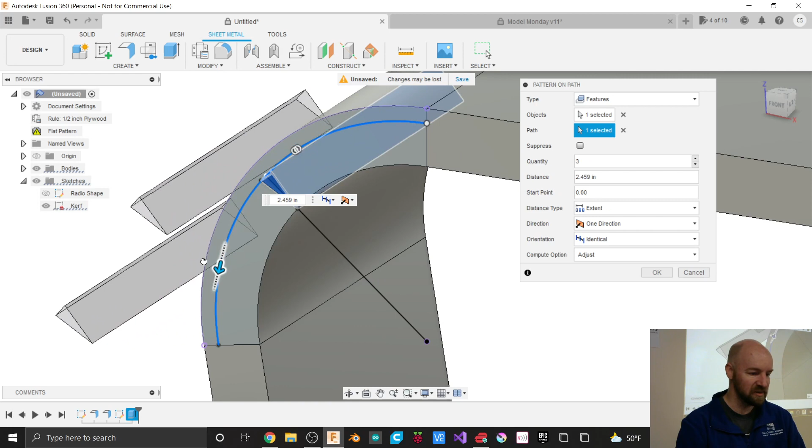And now I can draw out, oh, see, you can see it's definitely doing it the wrong way, but I'm going to go ahead and see this through here. So when you draw your arrow along the path that you're going to make, if you end up with something like this here, you just need to make an adjustment to your orientation.

So right now it's keeping the angle the exact same along the whole path, and I'm actually going to change this orientation from identical to path direction, and then you can see it's making a lot more sense here. So let me look at it straight from the side so it makes even more sense there. Now I want to make this pattern in both directions, and I believe that I can change this from one direction to symmetric. That's working out okay.

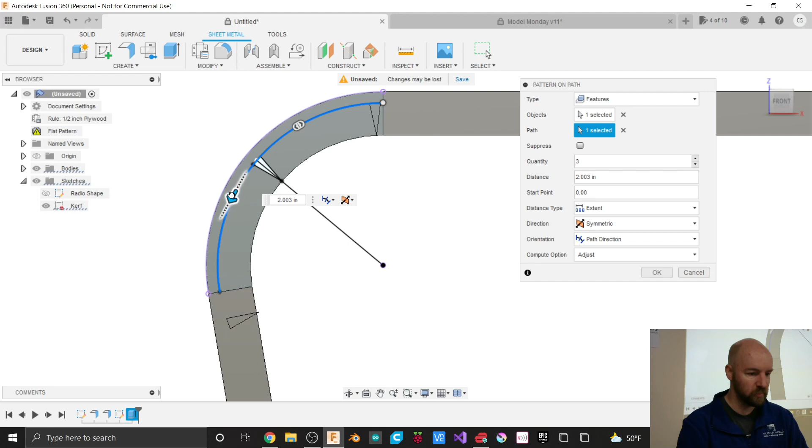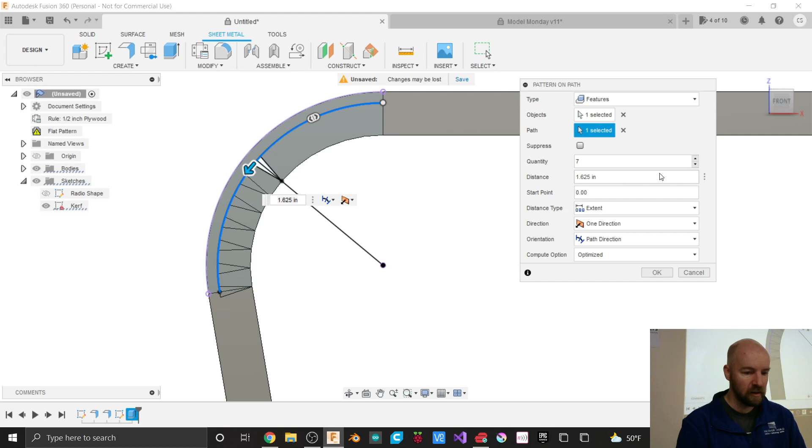That's a little weird, it's not quite symmetric. What about this? Can I change that? Nope, that's my number. So we're definitely going to want to make 7 of these cuts. What if I make it optimized? Yeah, it's weird that it's really not doing it symmetrically. Tell you what, I'm not going to do this symmetrically. I'm going to do it in one direction, and then I'm going to come back and do it again.

So there's going to be 4 cuts that go off in this direction here, and I'm going to bring that back just a little bit, because that's going to stop more like that. And I'll say OK. Oh, that didn't work at all. More info. Compute failed. The face selection is too complex to pattern. Try adding or removing from the selection. Too complex, huh?

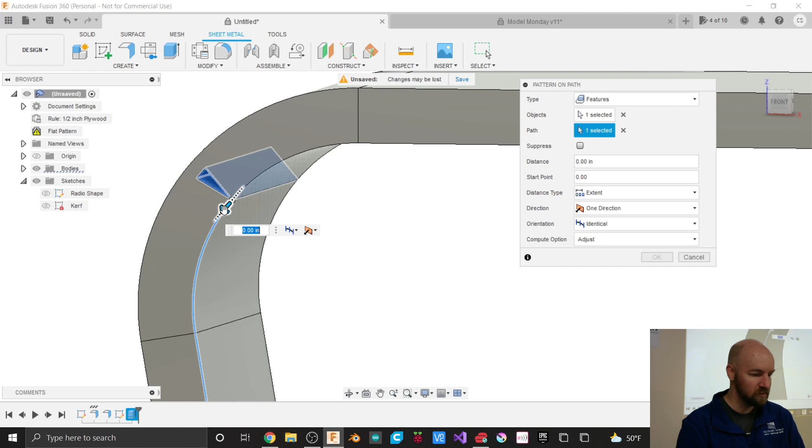Let's try that one more time. Create pattern, pattern on path. It worked in my test drawing. I'm going to make a pattern of this feature here. I'm going to choose this as my path this time. So maybe the problem was that my path wasn't the right path to choose.

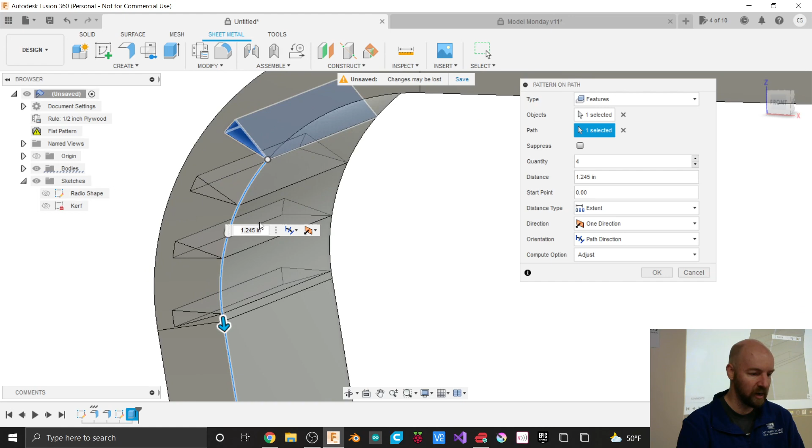Whenever I have one of those compute failed things, it's like, all right, what other lines can I pick on that are the same path? And try to roll with that. So let's see if it'll let me do it that way. There we go. Let me cut it that way. I'm going to do the same thing in this other direction here.

So I'm going to click on Create, Pattern, Pattern on Path. I'm going to choose that same extrude feature that I did that first time. And as the path, I'm going to pick this other side. And again, it's going to be the path direction, so that kind of orients it tangent to the path, I guess you could say, or normal to the path maybe is the right way of saying that. And I'm going to make 4 of those cuts. And I'm going to say OK.

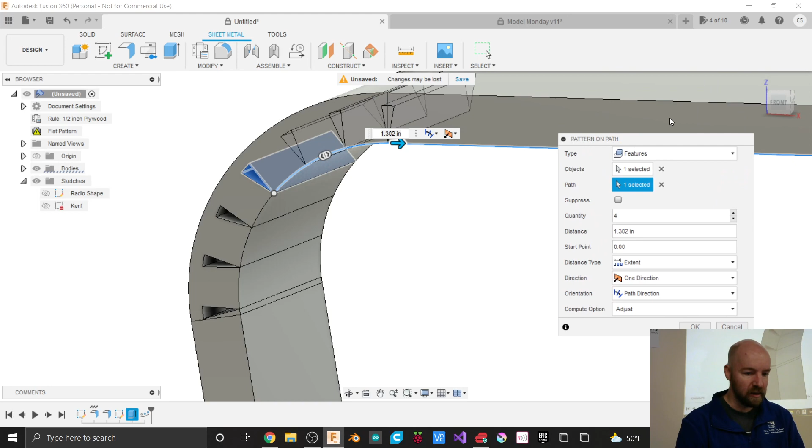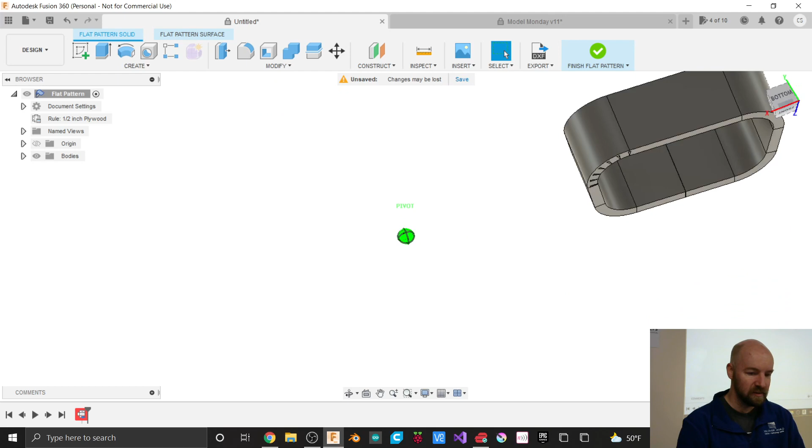So this is very similar to how my piece actually looks. And this is the part that I didn't have time to test. So now if I go back to my flat pattern, oh, nah, it didn't unfold it. Didn't like it at all. And that's going to be something that I have to work on for next class. But at any rate, when we actually make our piece, it is going to look like this. It's going to have all these little cuts in it. And you fill those with glue, and then you bend it together and clamp it, and then it stays in that shape.

But that is all the time we're going to have in this class. I'm going to do some experimenting in my own time and see if I can figure out how to make it unfold with those cuts. And if I can do that, I'll come back to you next class with how to make it unfold still. Something I'll mention is, modeling these kerfs is unnecessary because you know you're going to have to make them. So modeling them is kind of like a meh. But it's fun, and it lets us do new things, so that's why we did it.

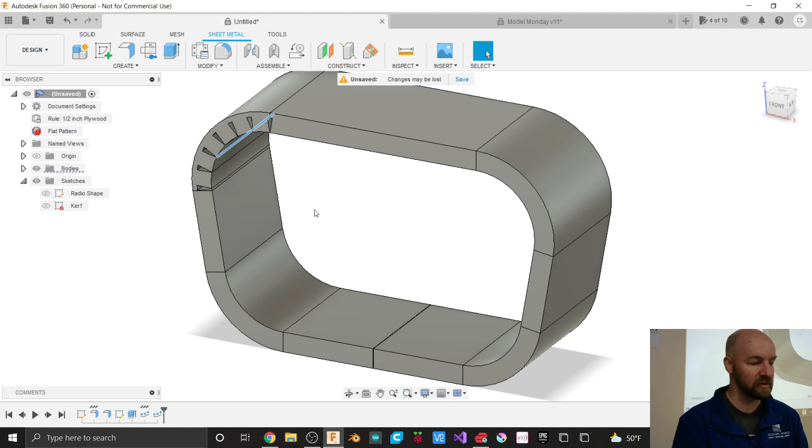So I'm going to catch up with you guys next week when we continue drawing our radio. I think next week, hopefully, we'll draw the front of our radio. Or maybe next week we should put our speakers in. We should model a speaker. And then we can have a location for our speaker planned out when we draw the front, because the front will have to have speaker openings, and planning for where we're going to put our knobs and all that kind of stuff. So next week we'll draw a speaker for the inside of our radio.